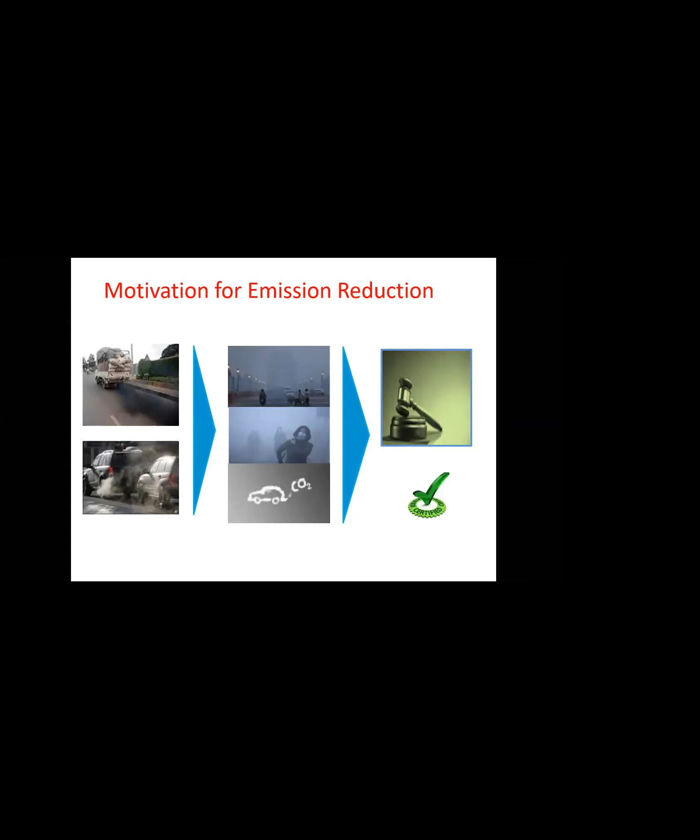Yes sir, thank you. So what drives the emission reduction in terms of automotive emissions? Because every 5 to 10 years we see there is a change in emission legislations which government takes, and what imposes government to take this call. Because if you see from an Indian point of view, there is no scrappage policy. The vehicle which was purchased in 1990, we are still continuing with the same vehicle that emits 15 to 20 times the emissions level which we are doing today.

So now as we are moving into the BS6 emissions regime, we have a lot of curbs from the government bodies and lot of various initiatives which we have adopted from the European Union and European cycle. That helps us in improving the air quality index, because every year when winter comes in the northern part of India, you might be hearing a lot of articles or news about smoke, and the air quality index has gone significantly low, which has a health impact, because the PM 2.5 which goes into the blood cells increases the toxicity level of the blood.

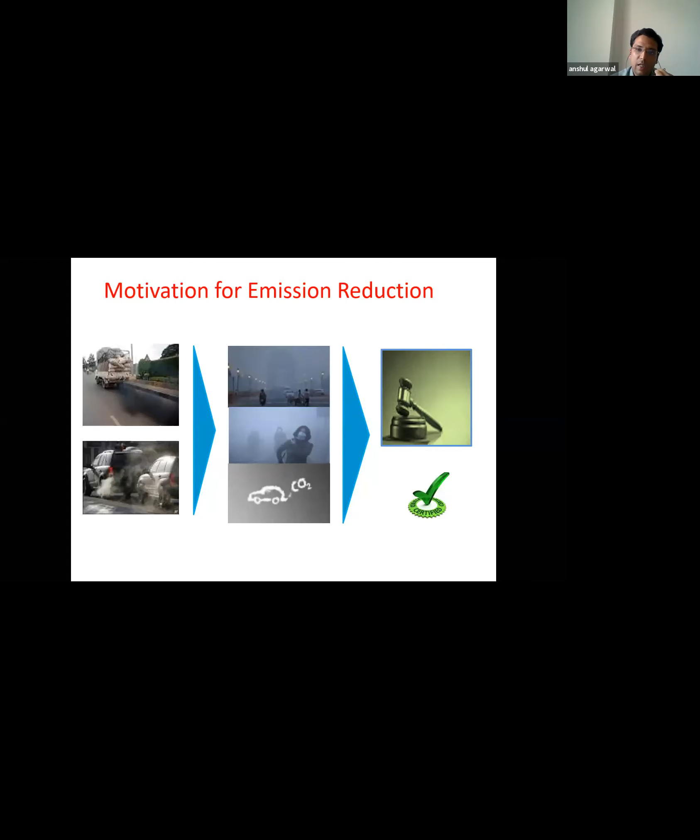So all these parameters push the Supreme Court and ministry to take healthy action on curbing emissions. Now, as we all know, emissions is the final and legislative task which every automotive has to take, because if we are not meeting the emission norms, then we are not going to sell our vehicle in the market. This is the, you can say, strict order which comes from government. But at the other end, as an engineer, we have some leverage by which we have to satisfy our customer, because finally the customer is king.

Various parameters like engine performance lead to the vehicle performance, fuel economy - my vehicle should give the optimum fuel economy as compared to my competitors, as well as cost, which is a major criteria in India that each and every engine manufacturer has to go by. Now I will tell you how we decide the performance.

There might be some category of customers which like a very low end torque, or the peppy drive - as soon as you put some part on your accelerator pedal, your vehicle should fly. For those type of people, fuel economy is not a concern. But there are some large quantity of customers who are more driven by fuel economy, and on that base they are slightly able to compromise on performance.

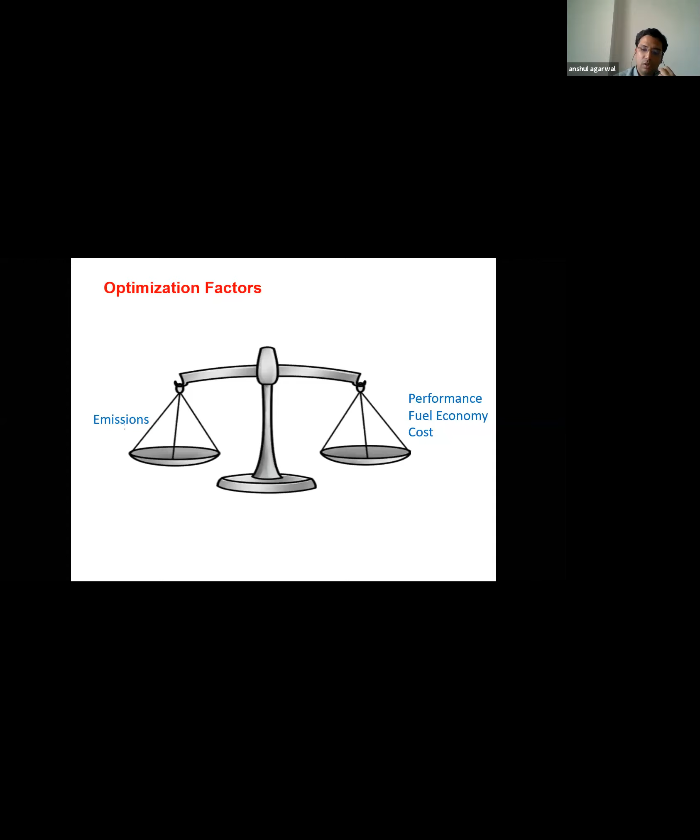That's how you can see it from a different OEM perspective. I can give you some example - if you drive any Maruti vehicle, you will get fuel economy, but you will not get the punch you used to get in a drive. But at the same time, if you drive any Mahindra vehicle, it will give you performance with an optimized fuel economy. So these are the parameters which drive the development that I will take care of in the subsequent slides.

Now there are various parameters on which we optimize engines. First, I have taken the emission part because that is the more complicated and final limit. So whatever I have shared in the first picture, it's an NEDC cycle, that is New European Driving Cycle, and it is divided into two parts.

One is the urban driving cycle, known as UDC, and it represents the city driving cycle, like in India you can take any metro city or somewhere. And the other one is the EUDC, known as extra urban drive cycle, which refers to a highway cycle, and it is a more aggressive and high speed cycle.

This is the cycle with a combination of different gears which we have to follow on a chassis dyno while performing the certification test. Now if I convert this cycle into my engine load points, that is speed and torque points, you can see the black dot points are my engine operating points which come under the emission driving cycle. So if I optimize these black dot zones, then I will be legally valid to pass my emission norms.

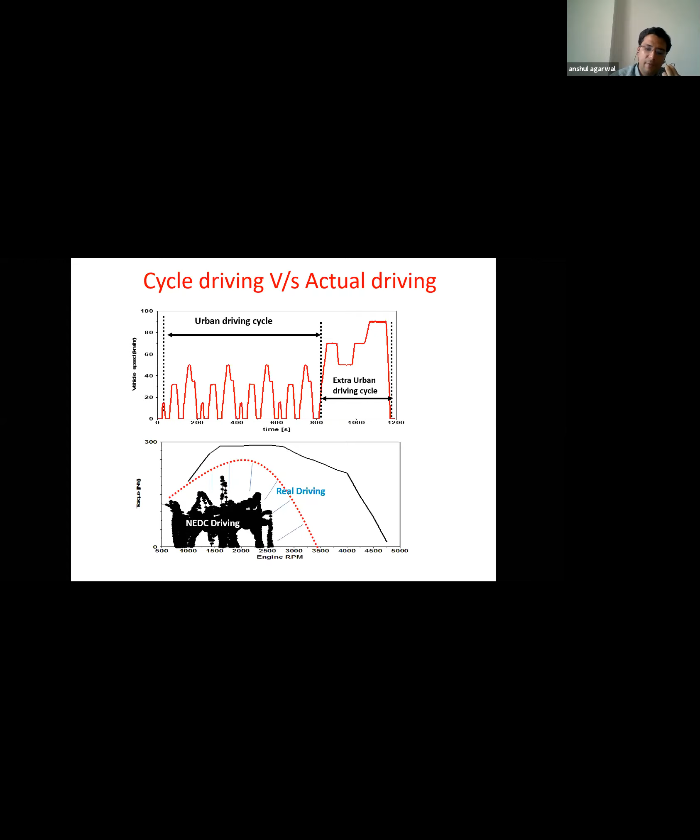What are the various parameters, why, and how we calculate the final emissions - the industry recognized these facts and has worked continuously for improved control of emissions as per auto fuel policy, and proactively developing environment friendly technologies. So now, if we see the final emissions which come out from my vehicle, it's a multiplicative factor of various factors.

One is the basic engine fuel consumption - this is the basic minimum fuel consumption which is required to sustain a speed torque point. So that will give some amount of CO2 emissions.

After that, the quality of fuel. If my fuel is not of good quality, then my combustion will not be proper, and it will significantly increase CO2 emissions.

Next point may be the quality of traffic management and traffic volume. So if we are driving in very stop-go type conditions, where our vehicle runs at very low load points, in these zones we have a higher brake specific fuel consumption because of higher friction.

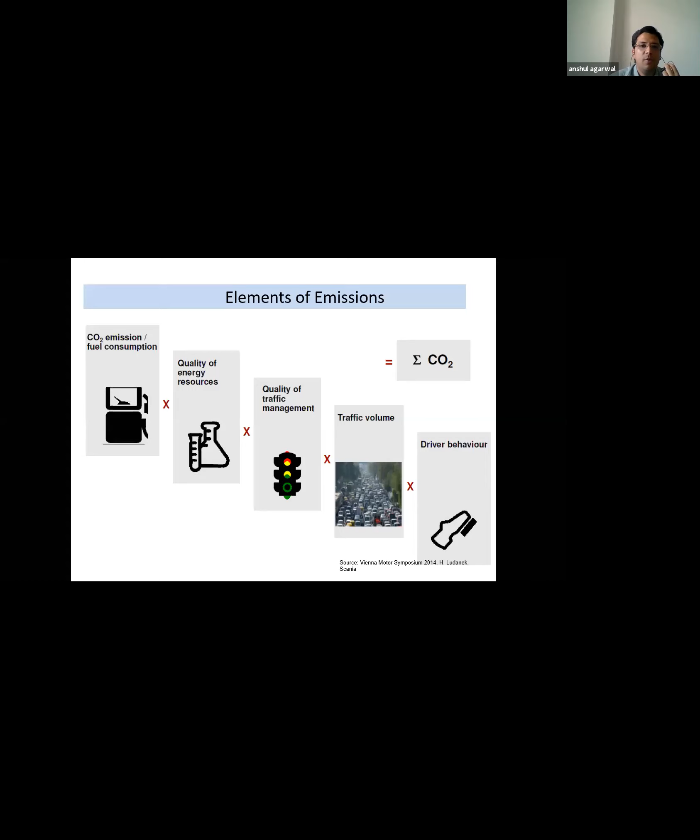Now I take you through the emission regulations journey - what India has done in the last, I will say, 28 years. The first stage of mass emission norms came into force for petrol vehicles in 1991, and in 1992 it came for diesel vehicles, but only for Delhi.

Then after that, from April 1995, it was made mandatory to put a catalytic converter for new passenger car vehicles in the major four metro cities - Delhi, Mumbai, Chennai, and Kolkata. One more parameter imposed was the use of unleaded petrol, and availability of unleaded petrol was increased to more cities over the next 3 years.

Then by 2000, there was a nationwide BS1 emission norm, what we can call it. In year 2000, passenger cars and commercial vehicles met Euro 1 equivalent emission norms, while two-wheeler norms at that point were among the most stringent norms in the category.

Then Euro 2 equivalent, that is equivalent to Bharat Stage 2 norms, was enforced in 2001. Again, that was imposed only in 4 metro cities, because BS1 came first in the 4 metro cities.

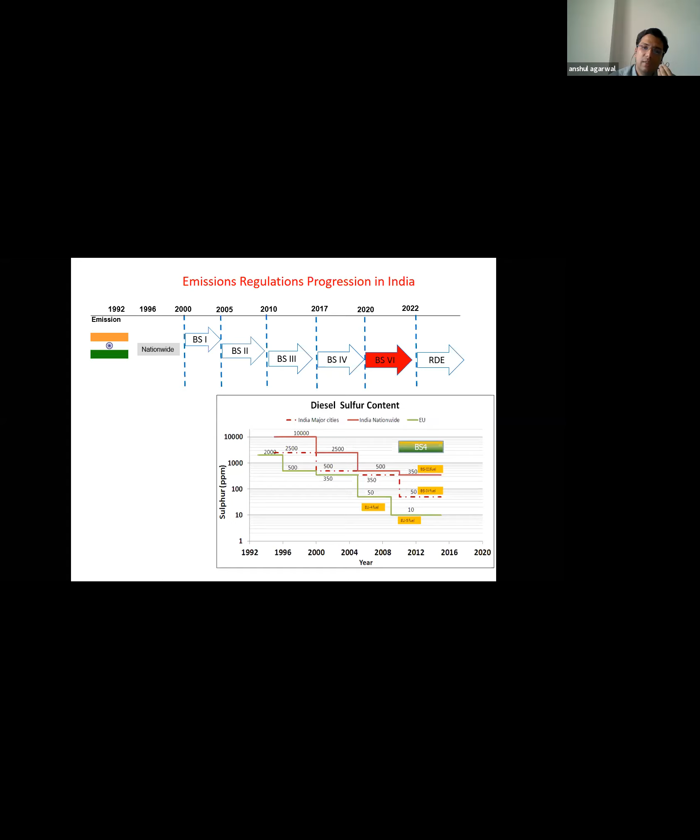Then as we moved down to BS6, fuel sulfur content was reduced to 10 ppm. This 10 ppm fuel is required to remove the ash content which gets deposited due to sulfur in the SCR emissions systems.

So now, give me a moment.

Then this is the basic from the fuel point system. After that, there are some two major hardwares which lead to performance as well as emissions - they are EGR cooler and turbocharger. Once we plug these two hardware, then we do the engine optimization with the help of software and ECU. In that we change the required amount of EGR flow rates, then pilot injections - one pilot injection or two pilot injection depends on our strategy - then main injection timing sweep tuning, as well as post injection implementation, because that is required for DPF. So this is, we did the tuning to meet the engine out emissions.

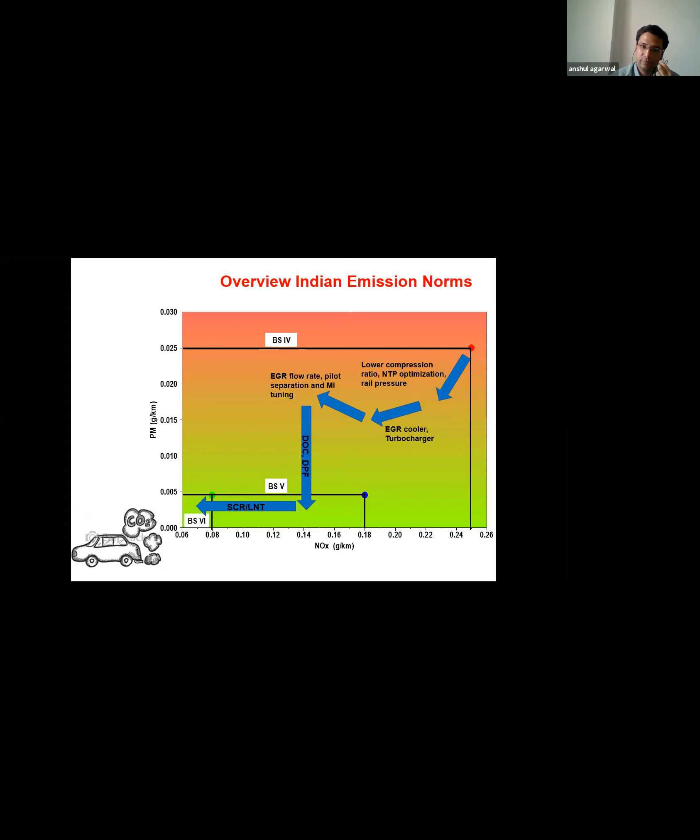Now the next part is engine calibration, like multiple injections - I told pilot injection, main injection, and post injection - coupled with various other calibration parameters like EGR rates, rail pressures, and timing sweeps. Then after that, this is my limit which my engine gives.

If you are able to meet my emissions norm with that, it is very well to go. Else I have to further kill the emissions coming out from my engine with the help of additional after-treatment systems. The most common of them are diesel oxidation catalyst, diesel particulate filter, and selective catalytic reduction or lean NOx trap. The purpose of the DOC is to reduce the HC and CO emissions. Diesel particulate filter is used to reduce the particulate matter, and SCR is used for the reduction of NOx.

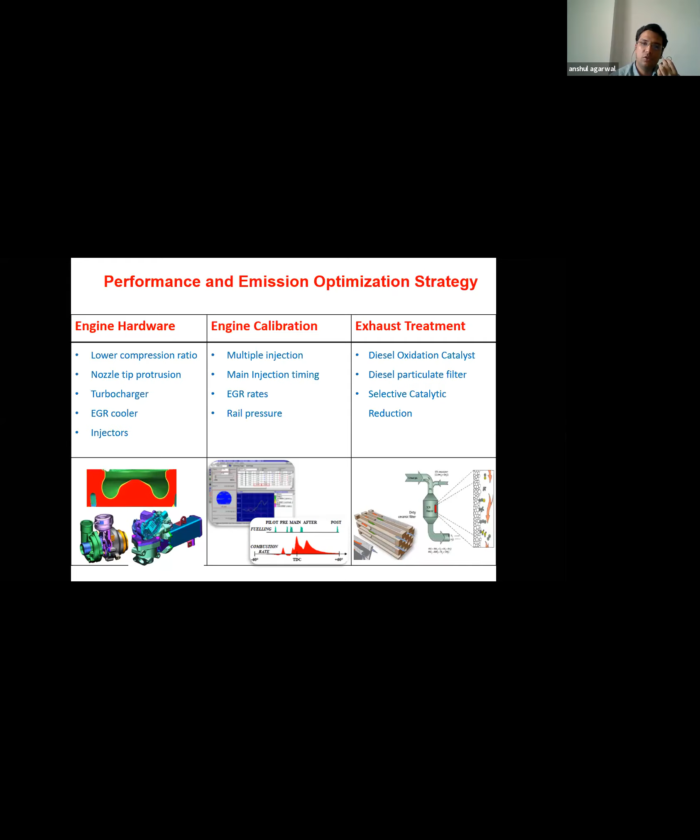Now we will discuss turbocharger. Turbocharger is a very important device nowadays, because nowadays we are moving toward downsizing of the engine, and we need more specific power density from an engine. So a 1 liter engine is giving 70 bhp, 80 bhp - that's the industry average - and some OEMs have moved to 100 bhp from a 1 liter engine. So if we have to meet this power requirement, then we need very good volumetric efficiency.

So turbochargers use the energy available in the exhaust gas to provide power to the compressor, and exhaust gas which contains energy in the form of heat and pressure is routed through the turbine. The compressor of a turbocharger is just like a diffuser which converts kinetic energy into pressure. Generally turbochargers are nowadays an integral part of IC engines to improve the low end torque and to improve the smoke limitations, as well as to improve the black smoke.

Suppose the engine is breathing at the atmospheric pressure which you are currently having at your place. But when we use the compressor or this turbocharger, it increases the boost pressure a couple of times, which allows an increase in the engine flow rate. That helps us in reduction of the smoke. And this follows a simple ideal gas equation of PV equals MRT.

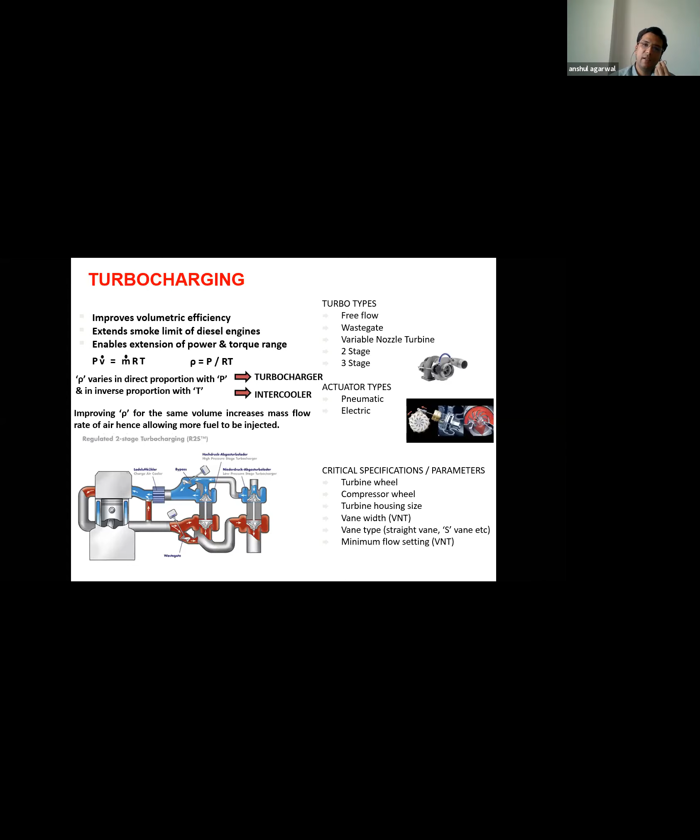Suppose if we are using a turbocharger that gives us a 300 degree compressor outlet temperature, and if we are using aluminum material, that will not work. Our compressor will melt and the blades of the compressor will change shape due to this temperature deformation. So we have to choose the compressor material according to our requirement.

As well, the compressor and turbine are both mounted on the same shaft, coupled with the help of journal bearing rotation. So we have to keep a proper oil supply with proper oil pressure going into the journal bearings for lubrication, so that there will not be wear of the journal bearings, and there will not be oil leakage into the system, sometimes due to breakage of the seals.

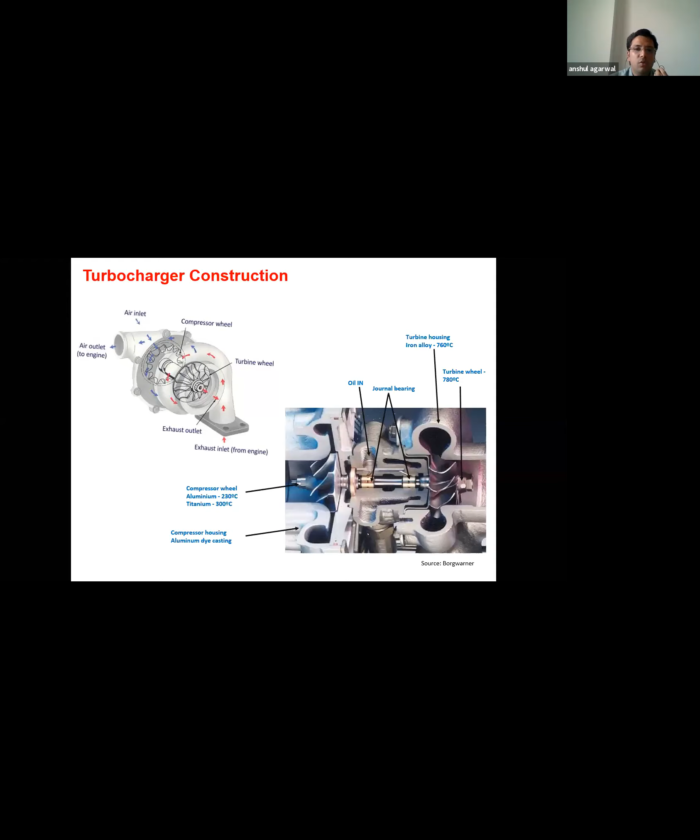And the last part is the turbine assembly. This turbine housing and turbine wheel should also withstand the higher temperature which is coming out from the engine.

So I will tell you the significance of why we need the surge limit. When we optimize our compression ratio with the help of boost demand, there is a pulsation in the system which sometimes resists, and we are demanding a very high boost ratio for a very low volume flow rate. This type of phenomena we have to avoid, because in this phenomena there is a pulse which sometimes acts high, sometimes acts low, and that sudden jerk in the system can sometimes lead to failure of the combustion.

As a thumb rule, we used to keep a 10% surge limit and 10 to 15% choke limit at sea level. Now you see the extreme right line, that is the choke limit. So choke limit is the maximum quantity of airflow for a particular pressure ratio which a compressor can give.

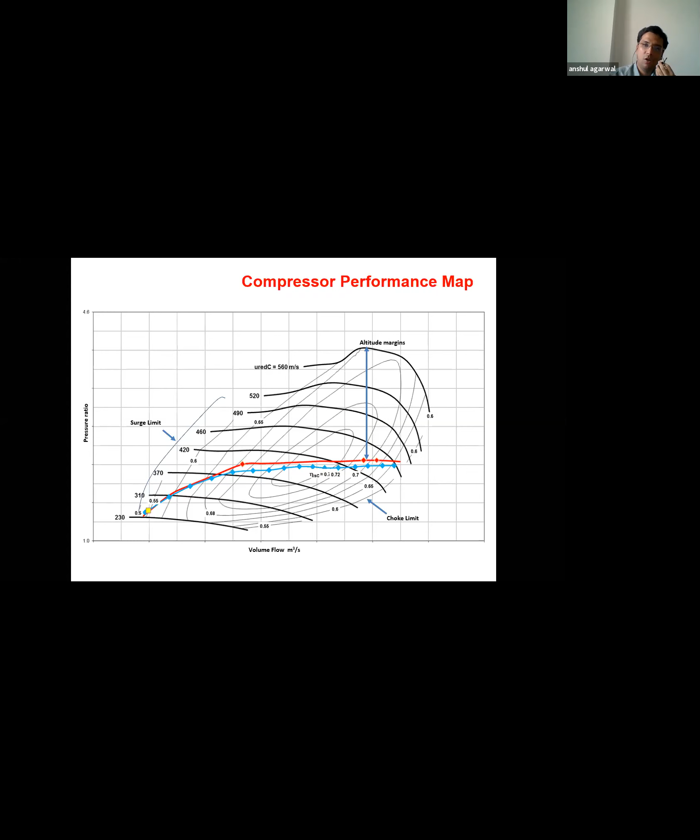Now this is the physics behind this. There are a lot of options available for a turbocharger and a lot of engines available. So if we don't meet the proper combination of turbocharger with a proper engine, then it may lead to a non-optimized performance. There are various parameters which we have to see, like noise from a compressor.

Once from the engineering side we choose these parameters, then I have to give this suggestion to my designers or vehicle team. So the vehicle team has to see whether I am able to package this compressor on my engine, and if I'm able to manage on my engine, then we have to check whether we are able to manage this packaging on a machine.

Sometimes it is not possible to manage with the same structure, then we do the design of some brackets and all this. Sometimes those things increase the mechanical stress on the systems, and over and above, it should not drive thermal and mechanical stresses on the engine compartment itself, because there are a lot of other sensors and ECU which take inputs from heat sensors or temperature based sensors. So in those conditions, our overall calibration can go for a toss.

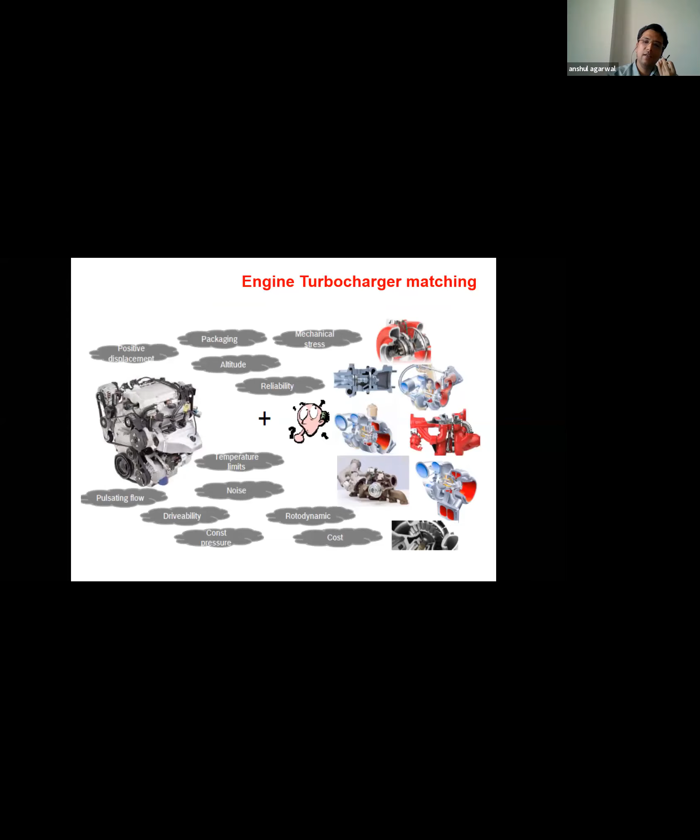So to address those things, we put some heat shields so that heat will not transfer to other components. So at one end there is a significant huge demand from the engine, and at the other end there are some limited offerings from a turbocharger. So this is just a huge matrix which I have plotted. Out of these four metrics, somewhere we have to find a solution which will fit our requirement.

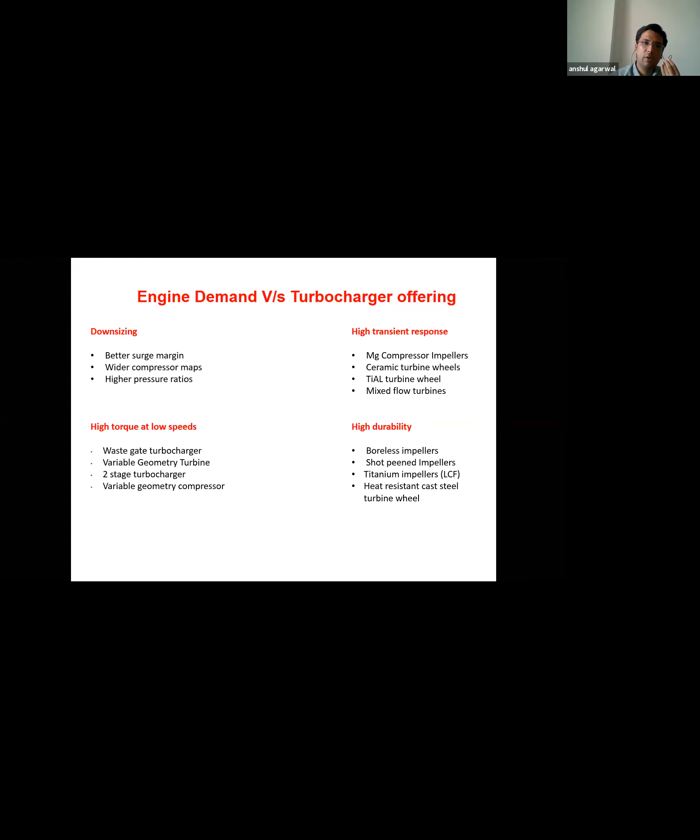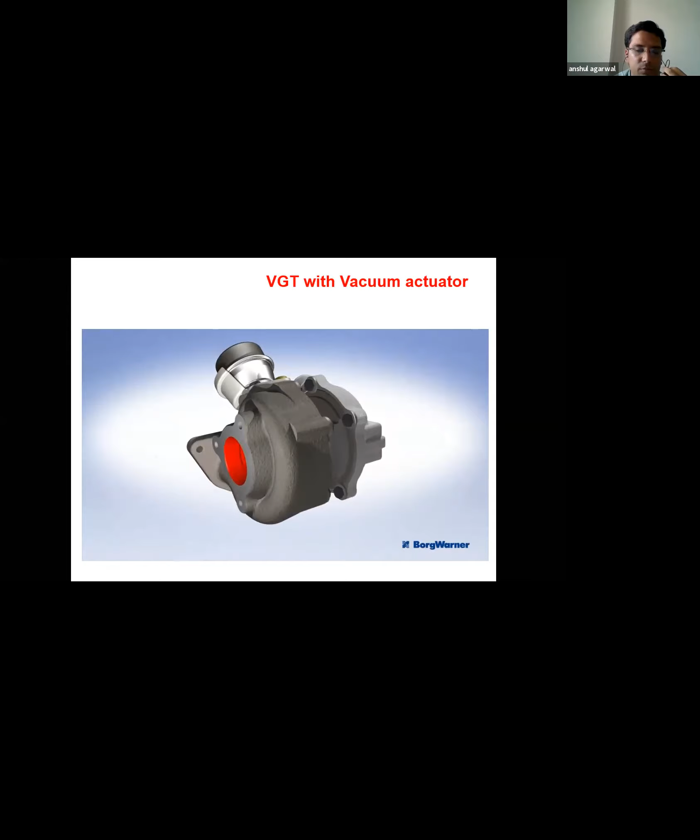Now I would like to take you through just the working of how this turbocharger VGT works. I have taken this movie from BorgWarner technology system, so you can get a good idea about how this turbocharger works.

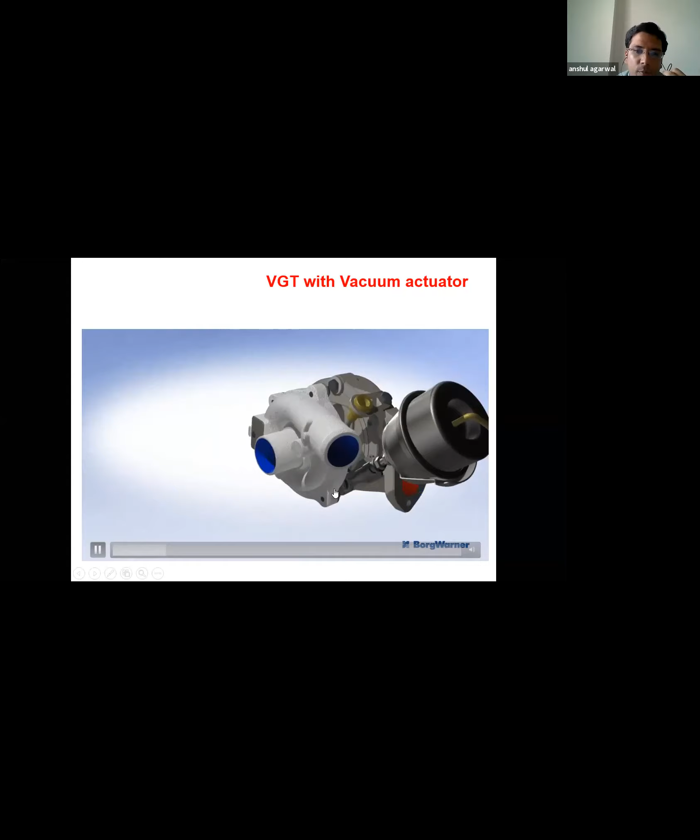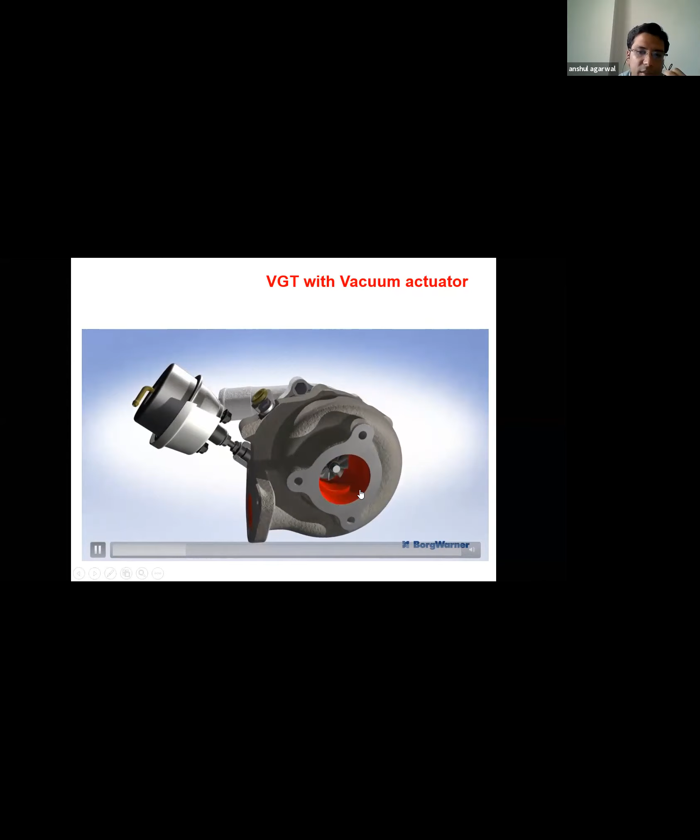So from this side, the axial path movement is the movement of air which goes inside the compressor, and the radial path is from where the compressed air comes out. This red zone you are seeing, that is the turbine side. This red signifies that there is a higher temperature at this point.

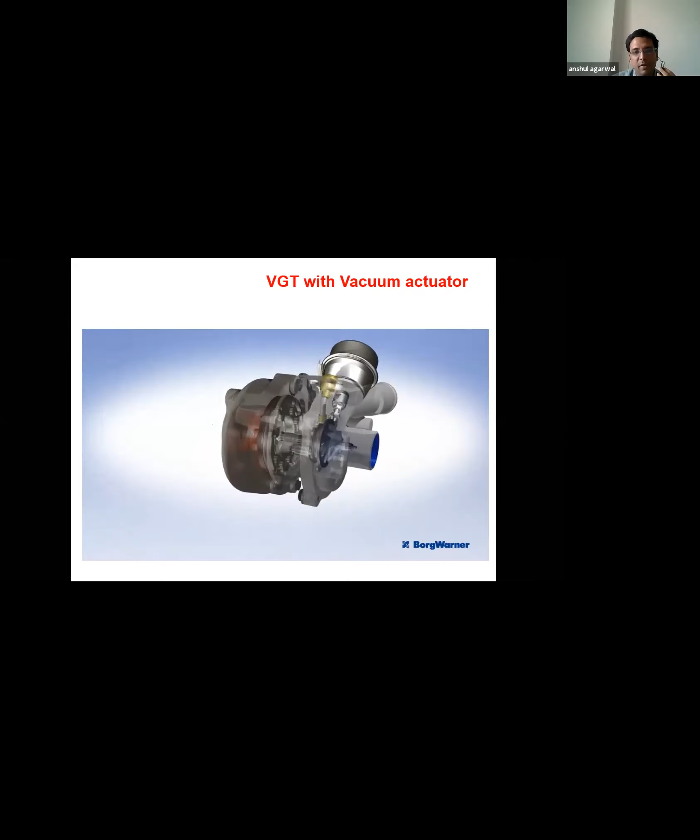Now you can see the inside geometry of a turbine. You can see there are some blades which can adjust themselves, and the compressor is a free float type, and both are coupled to the same shaft.

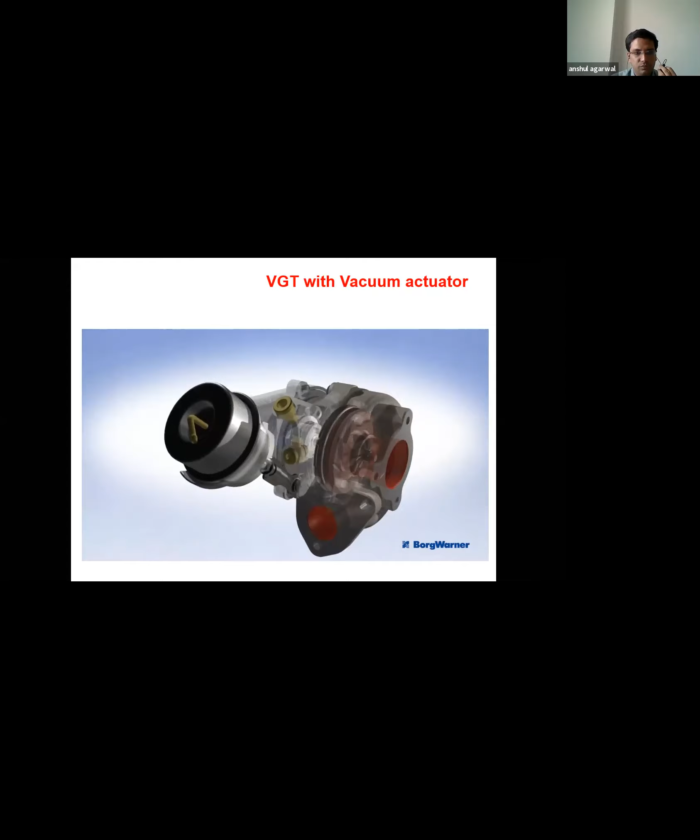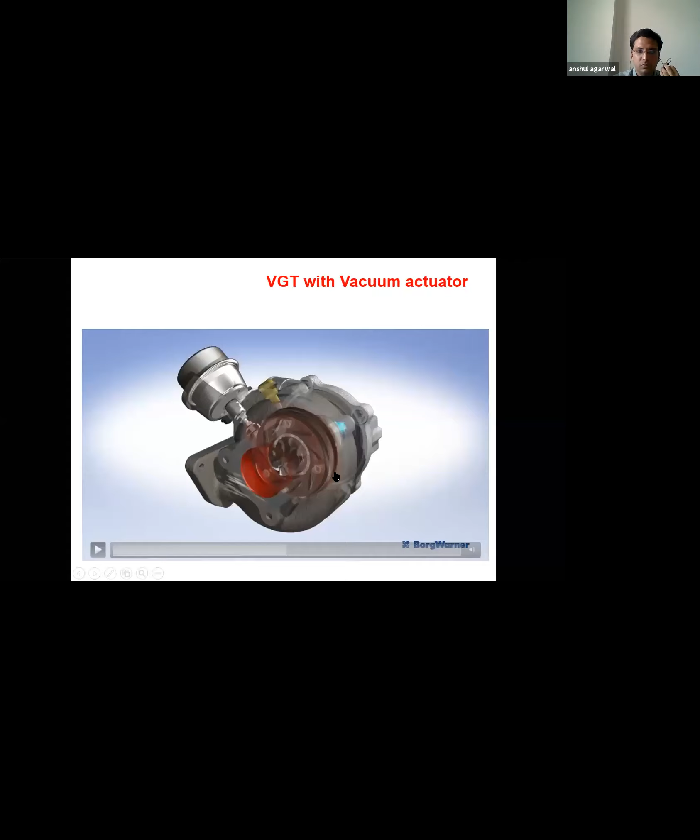You can see exhaust energy coming, and the turbine is utilizing it. On the other hand, the compressor is utilizing the axial air and moving out the compressed air radially. And in between this is an actuator - you can see the actuator is controlling the pressure if the pressure exceeds.

Now the next hardware is exhaust gas recirculation. So I told you earlier, one is turbocharger, and the next is exhaust gas recirculation. The exhaust gas recirculation is an emission control of nitrogen oxides, and whatever exhaust gas goes into the combustion chamber is not involved in any combustion reaction due to the lower oxygen content. The speed of the combustion process overall is thus reduced, and this helps in reduction of the peak flame temperatures inside the combustion chamber.

In India we are generally using the high pressure EGR system, which is based on the pressure difference. Higher the pressure difference from the exhaust side, the more exhaust gas will move to the compressor side. Apart from that, there is one more category called low pressure EGR, used in advanced emission norms, which I'll discuss in the future. And there is also hybrid EGR, a combination of high pressure and low pressure systems, because every system has some advantage and disadvantage.

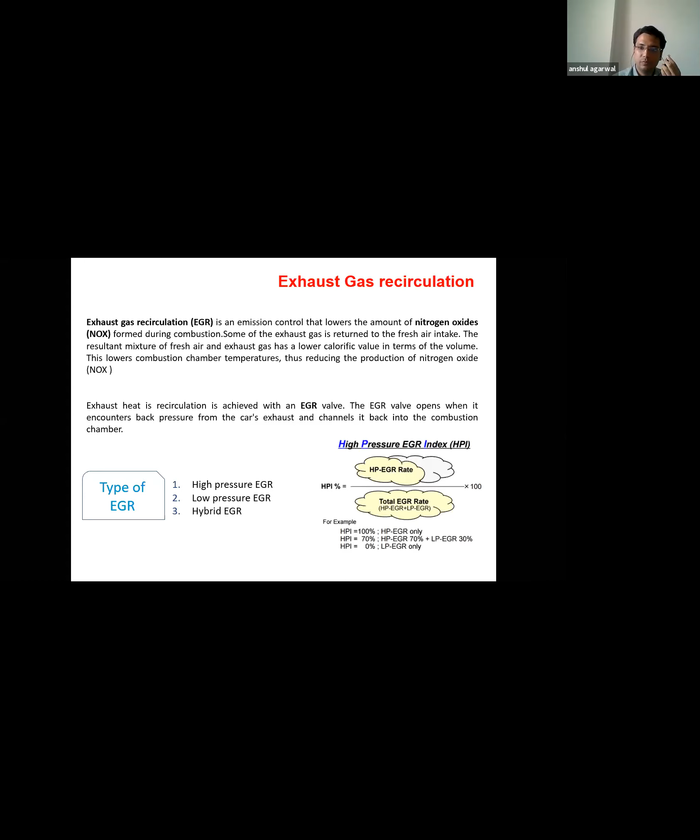Now in a high pressure system, EGR is routed from the high pressure turbine side to the compressor side with the help of a short path. A pipe leads some of the exhaust gas from the exhaust manifold, and we put it into the intake manifold where it is mixed with the fresh air.

This system usually contains at least a single EGR cooler, or in some older versions, just a valve, or in some cases two EGR coolers, because the purpose is to cool the exhaust gases, which helps increase the overall volumetric efficiency of the mixture once it gets mixed.

The advantage of this short route system is basically its simplicity and fast response. A couple of problems it causes: sometimes there is a crack in the EGR cooler or EGR cooler fouling happens. In those cases, if our exhaust temperatures are very high, the turbocharger is able to manage that temperature, but our EGR cooler inside tubes are not able to manage. So if we have very high thermal stress on those, there are chances of punctures. So we have to monitor with special sensors at the EGR cooler inlet and outlet, and take care during the development process so that there is no failure mode in the field.

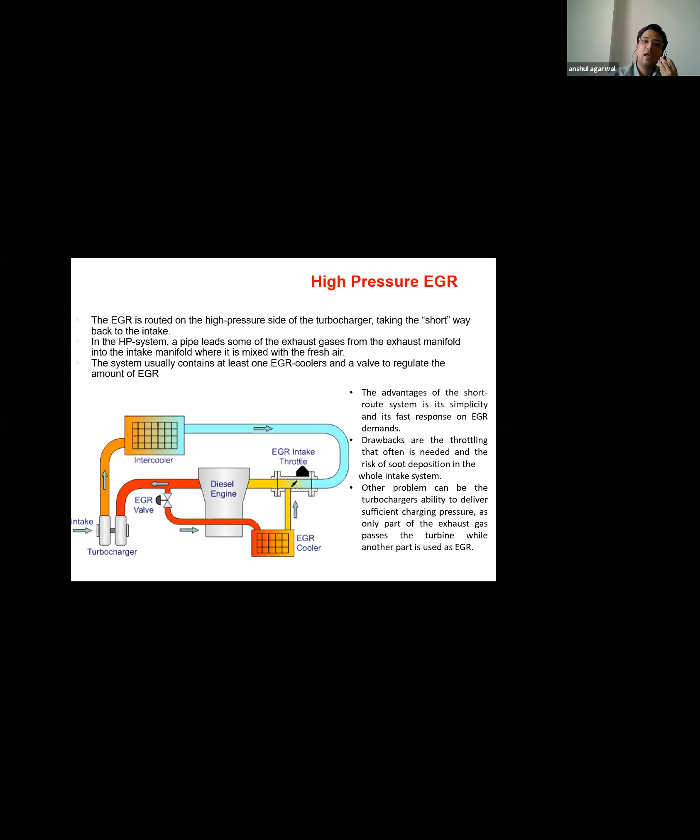This is also coupled with an EGR cooler. In this case, the rating of the EGR cooler will be less, because we are taking out the exhaust gas from a lower end, so there will be a lower temperature as compared to the exhaust manifold mode. Once we send it just before the compressor, there is a chance the compressor temperature may increase, because earlier the compressor was taking in ambient temperature, whereas in this case the temperature will be higher than ambient. So overall compressor outlet temperature will be on the higher side.

So these things also we have to keep in mind. And in parallel we also have to keep an eye on the soot deposit on the compressor vanes. If there is a high amount of soot deposit, then the clearance between the two vanes will reduce, and that will reduce the volume airflow, and further it acts like a further choking.

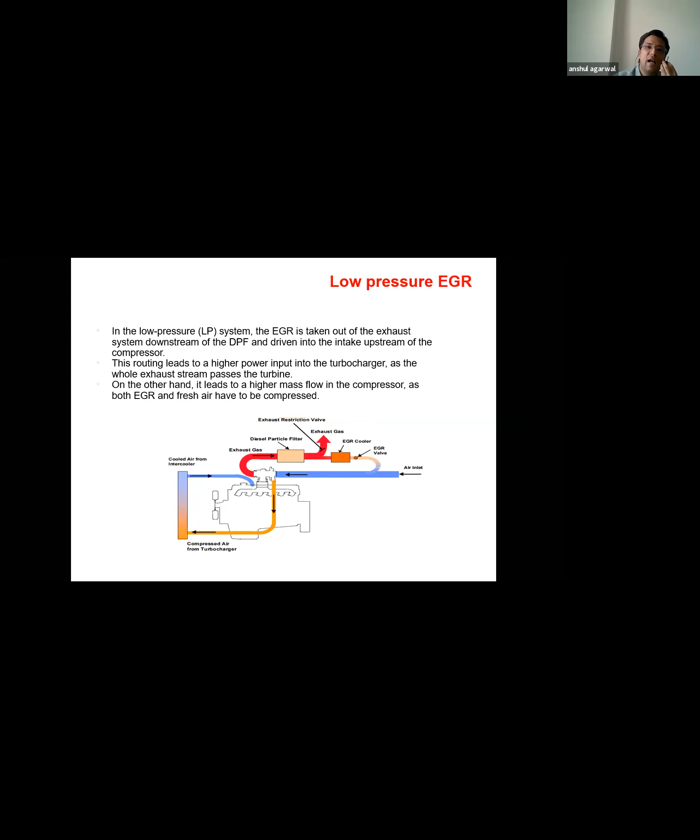Then one is the hybrid system, that is in between the high pressure and low pressure system. So when you need a dynamic cycle, it should shift to the high pressure EGR system, and where you are using the cruising vehicle on a very steady state condition, you don't need very transient response, there we can use the low pressure EGR path.

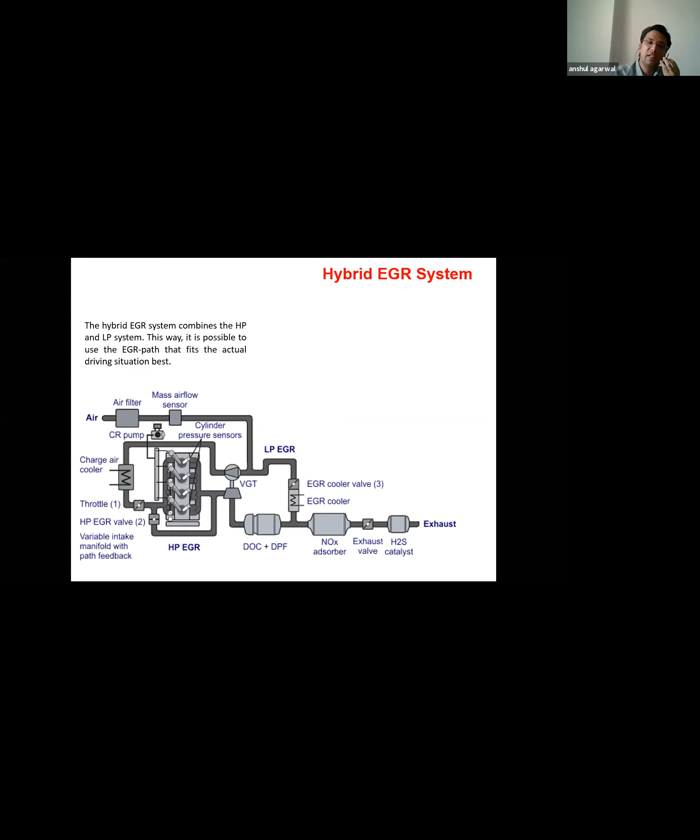Then one more technique we use is the compression ratio reduction technology, because this helps reduce the compression ratio, helps us reduce the overall flame temperatures, and due to this longer ignition delay, we can use more intense pre-mixed combustion if we know the different phases of combustion. So we are increasing the length of pre-mixed combustion, and local air fuel zones are also reduced. This gives slightly more clearance volume, which helps us in reduction of soot.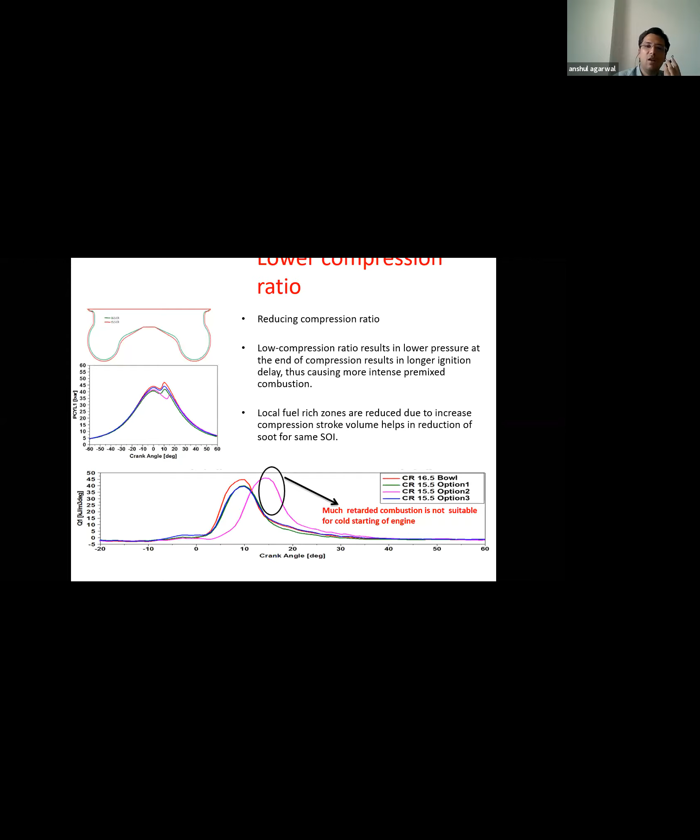Then combustion bowl design. Now the combustion bowl shape itself is very complex. So for your information, since most of you may not be aware of the various chemistry and physics that goes into the combustion behavior, I have taken out some major steps regarding what we can do from a combustion bowl side that helps us in different emission reduction.

So first and most important is the port swirl. Now as we are using the high pressure common rail system, we are trying to reduce port swirl as well as increase the throat radius, so that the fuel coming out from the injector should not hit the lip height. You can see on the right hand, because if the fuel hits this lip height directly, it will divide into two parts, acting like an impact. That will form very heavy atomization particles, a highly equivalent zone, and it will not take part in the momentum.

So my task should be to inject the spray to a lower radius of the lip, so that once it hits, the majority will go to the downside toroidal radius, and some part will go to the lip height and above the clearance volume or the cylinder head wall. This helps the impact spray momentum as well as vortex formation, and this vortex formation helps us in soot as well as NOx reduction.

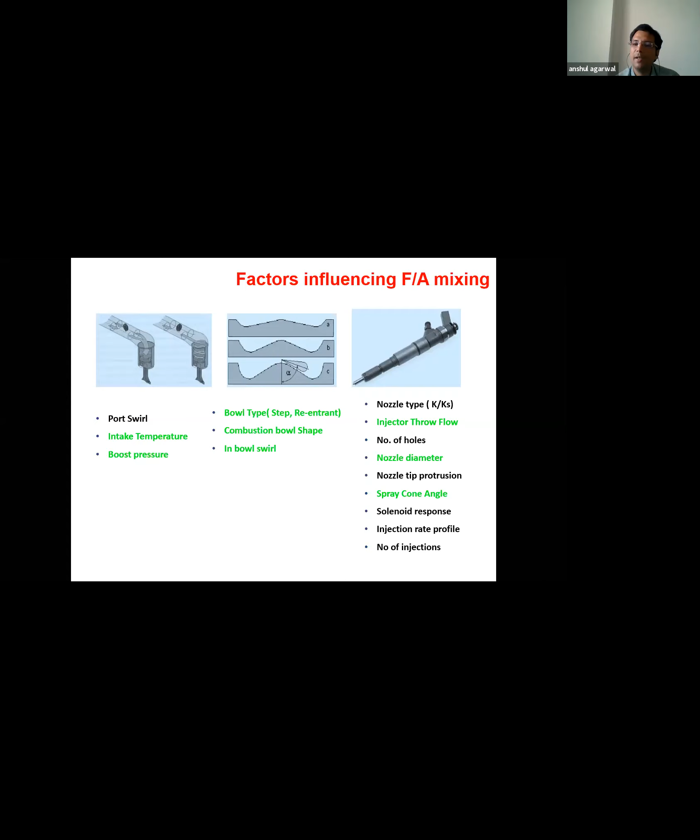One is the type of nozzle we are using, number of holes, nozzle diameters, nozzle tip protrusions, spray cone angle, then solenoid injector rate profiles, and number of injections - what an injector is capable of doing.

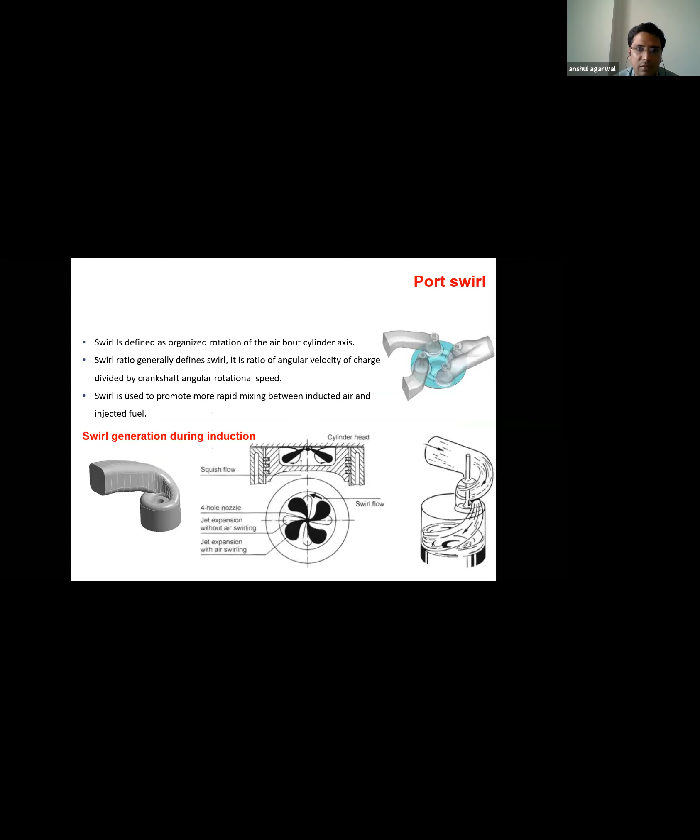I'm cutting down this portion a bit because we are a little delayed and I have to join some meetings at 3:30, so I'm cutting out some points like port swirl. Now I will share what points we have to consider while working on injector bowl design.

This is very strong. Now, as I told you in this slide, we have to put the impingement at the lower lip height so that most of the fuel goes into the toroidal radius and forms a high vortex zone.

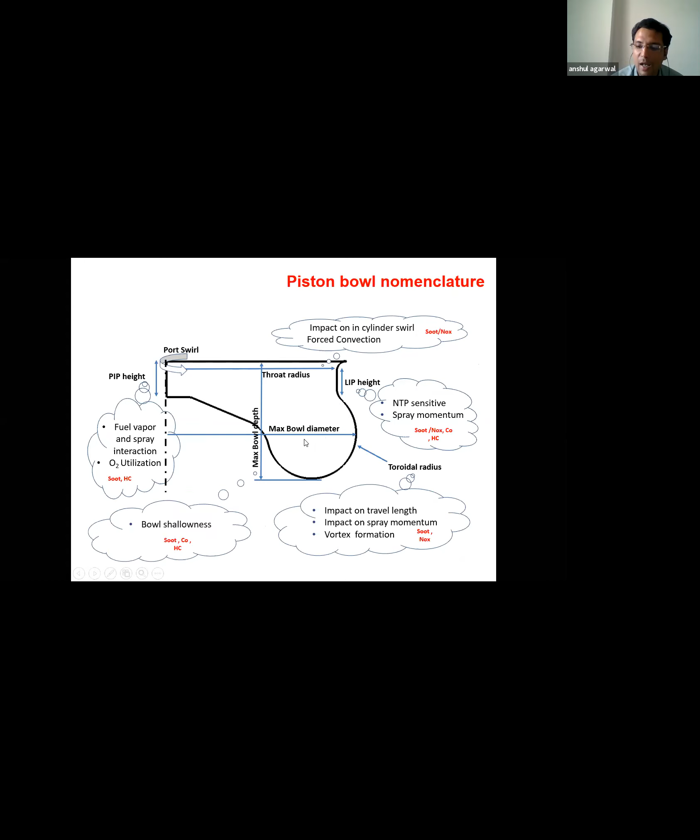You can see from the left, the first picture shows the vortices. These vortices should be strong - higher vortices lead to lower soot formation inside the combustion bowl. The second picture is a 1D, 2D representation of the spray and where it is hitting. The last picture is from a top view.

Now when I'm having a good amount of swirl with 8 or 6 holes, there's a spray pattern each hole will make. Due to the swirl, these sprays or plumes - we call them plumes - should not interact with each other. There should be sufficient gap between all these plumes.

Otherwise, these two plumes will interact with each other and form a rich zone. From a top view, you can see various holes spraying and moving - they should not cross each other, otherwise it will overlap and create a very high equivalence ratio zone.

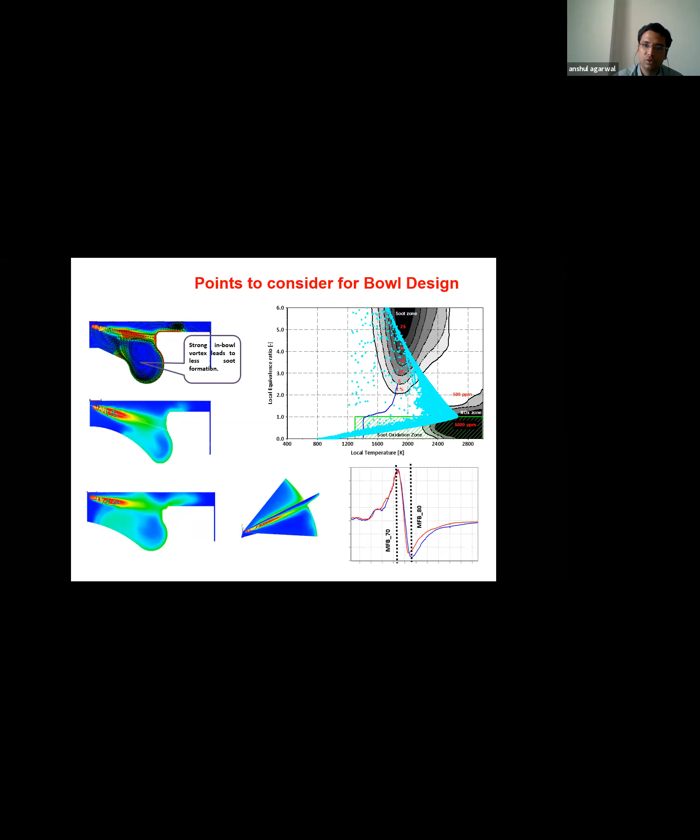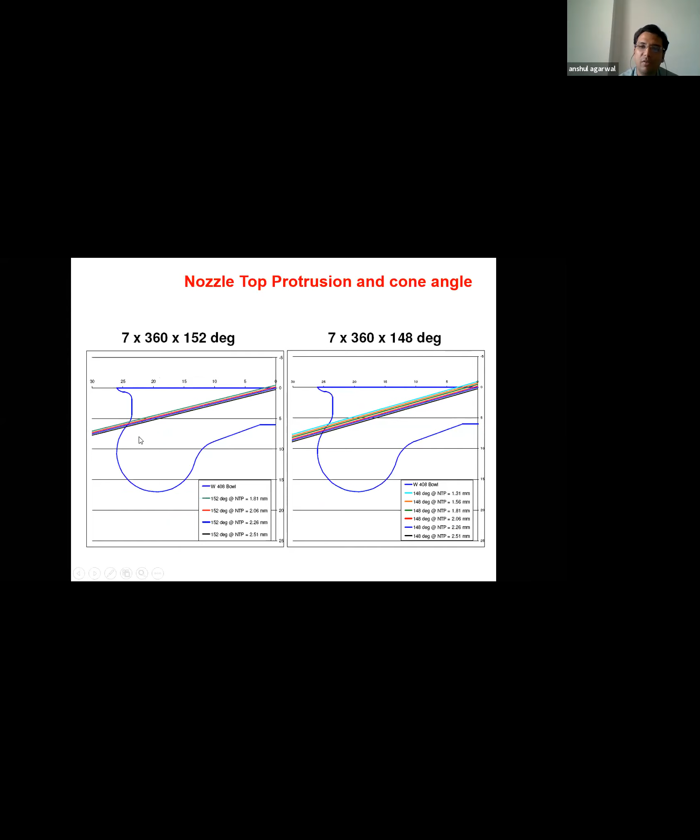From a simulation point of view, when we do these simulations, we have to keep this in mind as combustion parameters evolve. Our target is to keep the equivalence ratio as low as possible, with lower soot temperature zones. This is a representation of various spray cone angles and where they hit - this is the optimization we can do from a combustion optimization point of view.

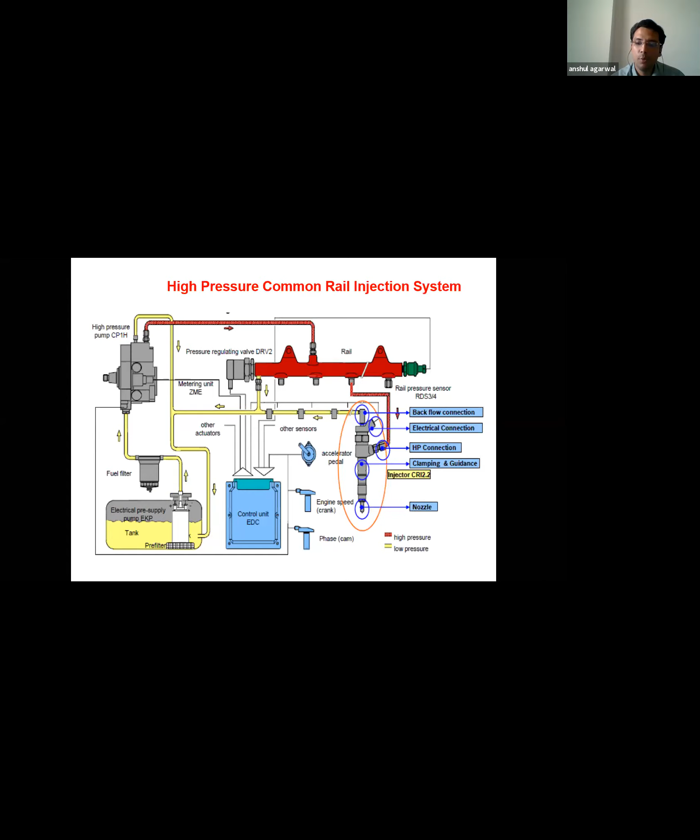Then, as I mentioned, the high pressure common rail injection system is very common nowadays. All OEMs, even in agriculture, have migrated from mechanical fuel pumps to the common rail system.

The last area is friction reduction. There are various areas that cause friction reduction for BSFC, because one set of customers is very focused on fuel economy, and whatever you do from a calibration or hardware point of view gives limited success. But there are various avenues in your base engine itself where you can work to reduce engine friction.

That includes crank train, valve train, piston ring tensions, and lower friction oils. Each of these has some advantage as well as disadvantage, but we have to balance that during development and do risk mitigation activities as we can afford.

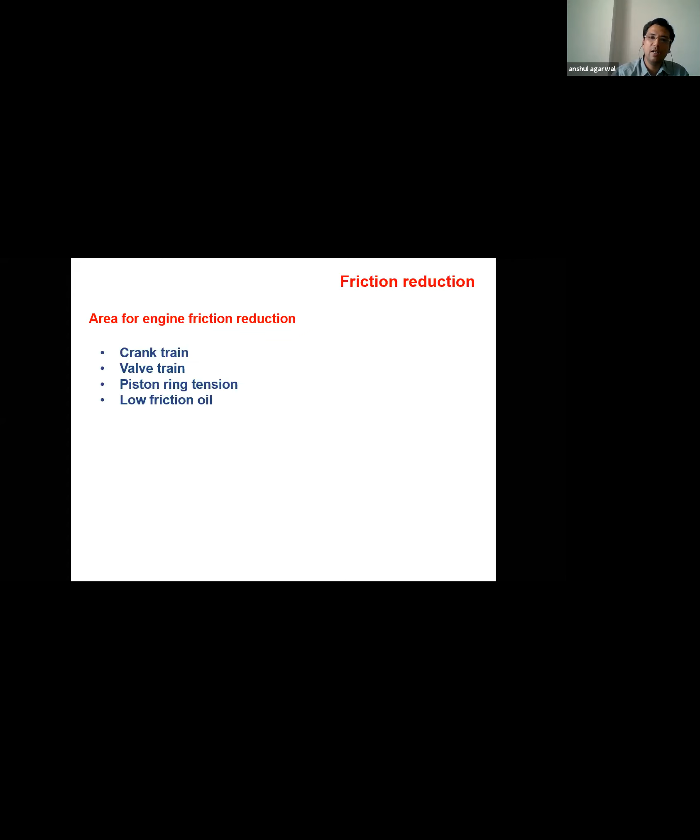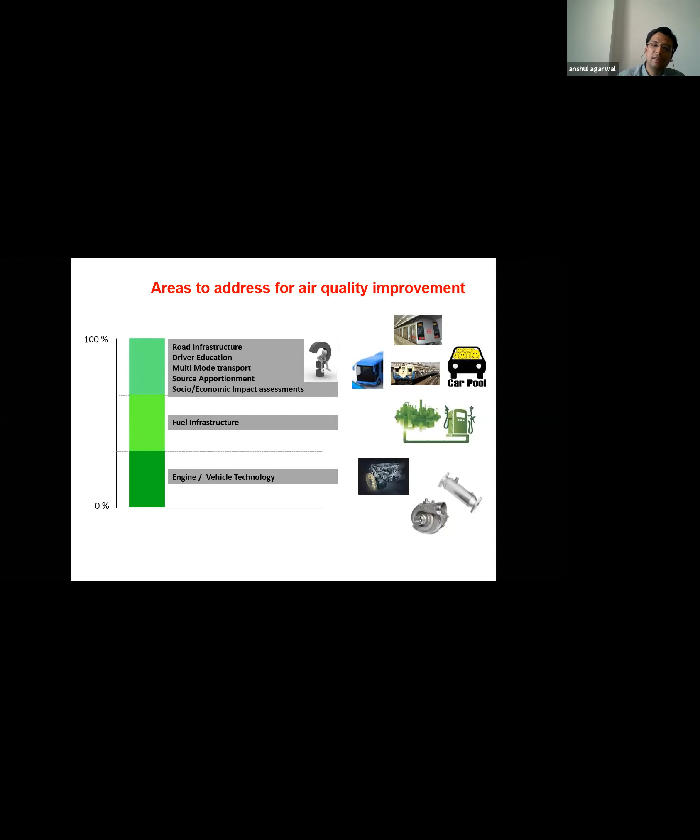There are various areas by which we can improve air quality - to some level from engine and vehicle technology, then from fuel infrastructure. There are also social impacts and driver education, like driving behavior, road infrastructure, different modes of transportation, and fuel infrastructure - meaning alternative fuels that generate fewer emissions, like E100 or B100. So this is, in short, what I've described given my timing.